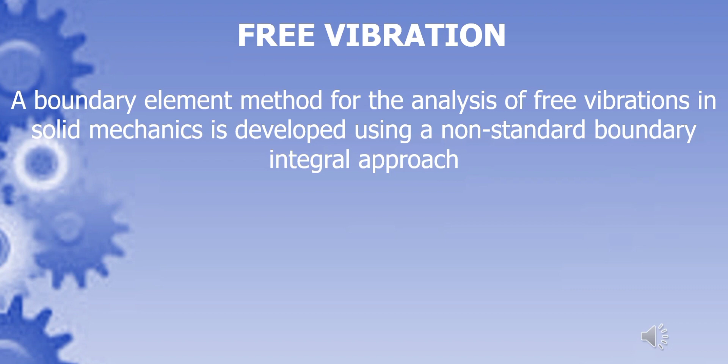So let's move to the next slide. Free vibration again — it offers a great alternative for harnessing green energy and has been receiving significant attention for the past few decades.

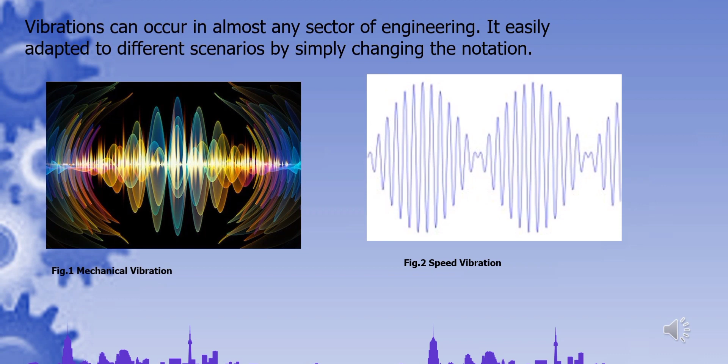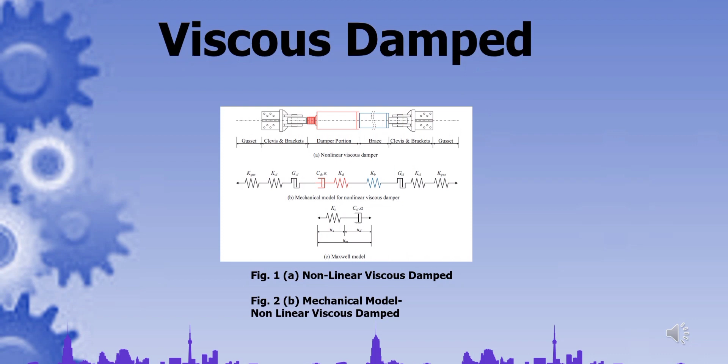Now, after we discuss the free vibration, now let's proceed to the next topic, which is the viscous damping. So, what is viscous damping? Viscous damping is damping that is proportional to the velocity of the system. It means that the presence of frictional forces in the structure transforms the mechanical energy of the system into other forms of energy such as heat.

So if damping is completely absent, in an ideal system, a structure once excited will oscillate indefinitely with constant amplitude at its natural frequency. For example, a viscous damper model considers damping behavior to be similar to a piston moving in a viscous fluid. The viscous damping forces produced are proportional to the velocity of the piston. However, the actual damping in a structure may result from looseness of joints, dry friction between components, material damping, structural damping, and many other complex causes that would lead to nonlinear behavior of the structure.

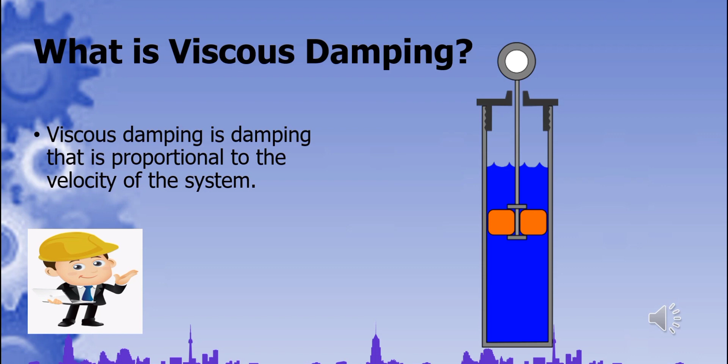So now let's proceed to the equation for damping. We will only consider linear viscous dampers, where the damping force is linearly proportional to velocity. So the equation for the force or moment produced by the damper in either x or theta is: F sub c is equal to c times x dot, and then M sub c is equal to c times theta dot.

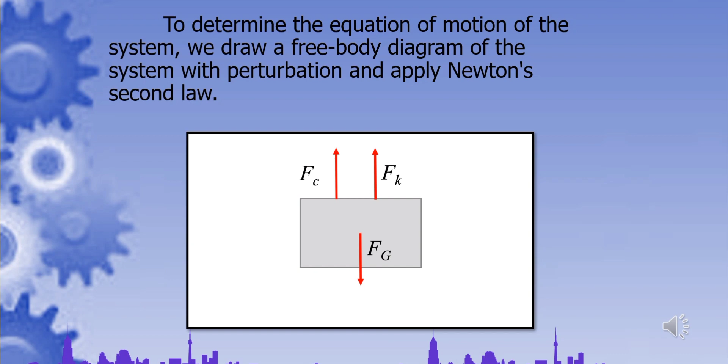So as we can see, to determine the equation of motion, we draw a free body diagram of the system with perturbation and apply Newton's second law. From the free body diagram, we can derive the following given: the mass m, the stiffness constant k, and the damping constant c.

So if we derive, net force sub x is equal to mass times x double dot, and then minus f sub k minus f sub c is equal to m times x double dot, and then minus k times x minus c times x dot is equal to m times x double dot. Then the final equation is: m times x double dot plus c times x dot plus k times x is equal to 0.

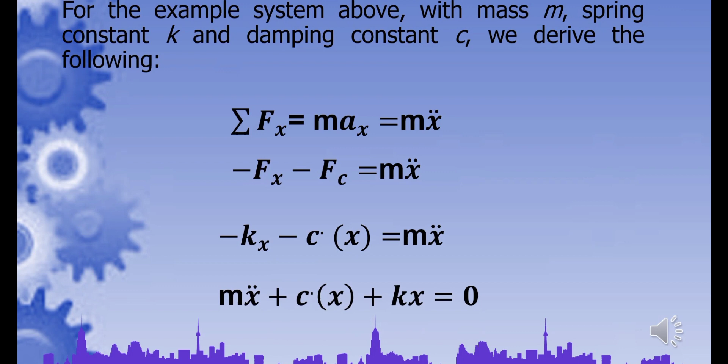So after that, the solution of the differential equation yields the crucial damping statement. So the following is the solution to the system differential equation, and that's it.

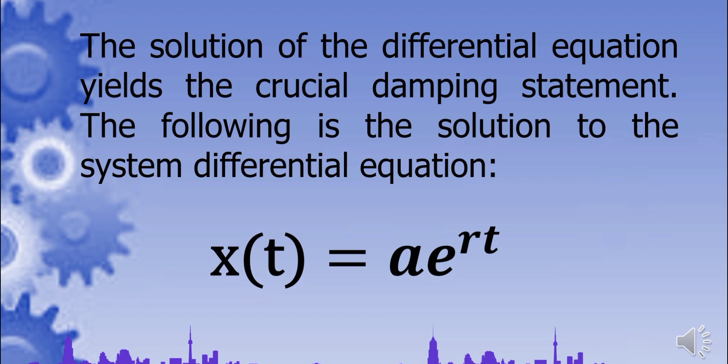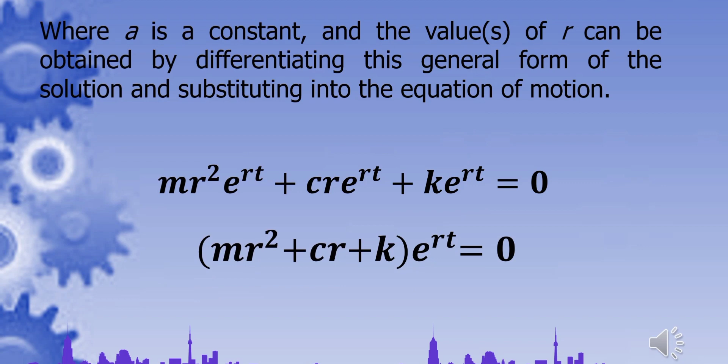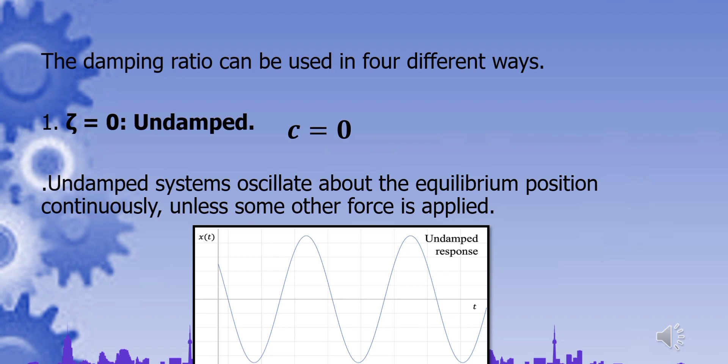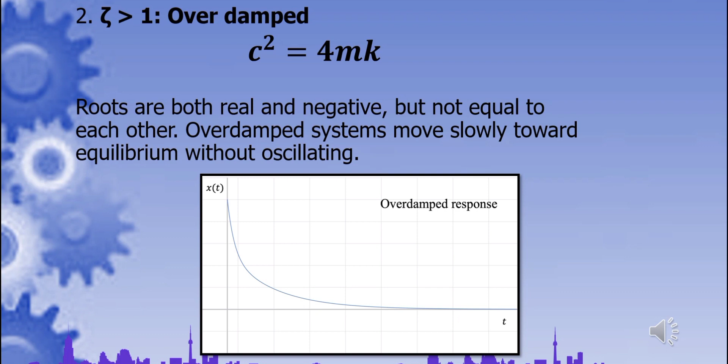Next is overdamped, or C squared is equal to 4mk. Roots are both real and negative, but not equal to each other. An overdamped system moves slowly towards equilibrium without oscillating. Ganyan yung itsura niya sa figure, overdamp, kung paano siya mag-response ng wave ng paggalaw niya. Andito, makikita niyo yung solution for overdamped system.

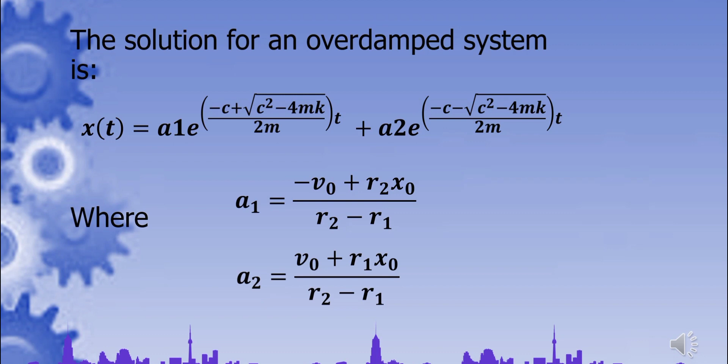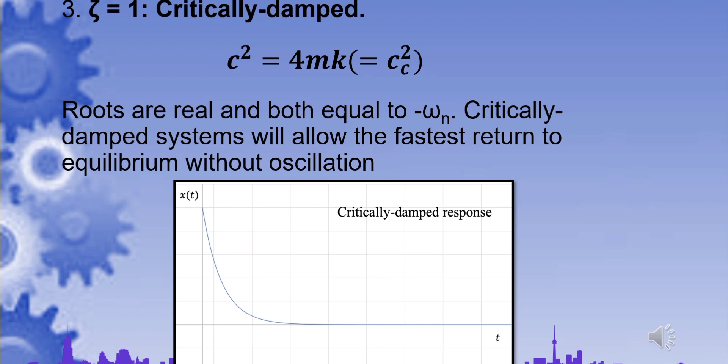The solution for a critically damped system is x of t is equal to (a plus bt) times e raised to negative omega sub n t, where a is equal to x sub 0, and b is equal to v sub 0 plus x sub 0 times omega sub n.

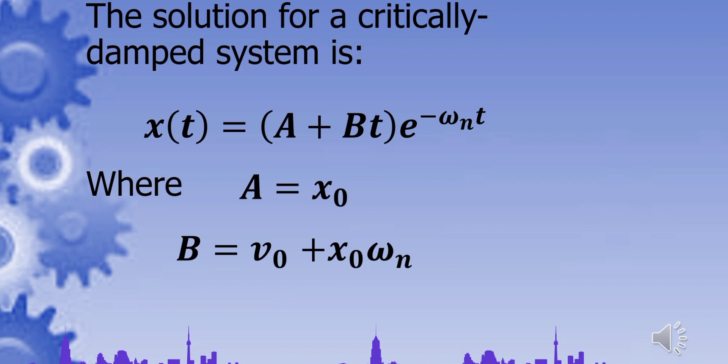Underdamped. Complex numbers make up the roots. Systems that are underdamped oscillate around the equilibrium point. Unlike undamped systems, the amplitude of the oscillations decreases until the system reaches equilibrium and stops moving.

Pag sinabi nating oscillator or oscillations, ito yung pattern na nagbabalik sa original state o kung saan siya nagsimula, after many generations of finite numbers na dumaan sa kanya.

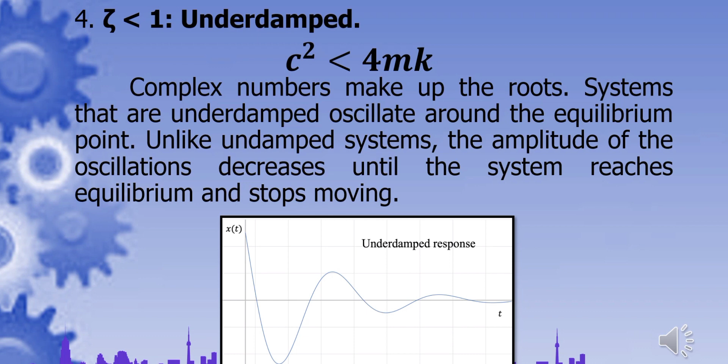Sinasabi dito sa underdamped system, ito yung condition in which damping of an oscillator causes it to return to equilibrium with the amplitude gradually decreasing to zero. The system returns to equilibrium faster, but overshoots and crosses the equilibrium position one or more times.

The solution for an underdamped system is x(t) equals c1 sine omega d t plus c2 cosine omega d t, times e raised to negative omega sub n zeta t, where c1 equals v sub 0 plus omega sub n zeta x sub 0, over omega d. C2 is equals to x sub 0, and zeta is equals to c over 2m omega sub n.

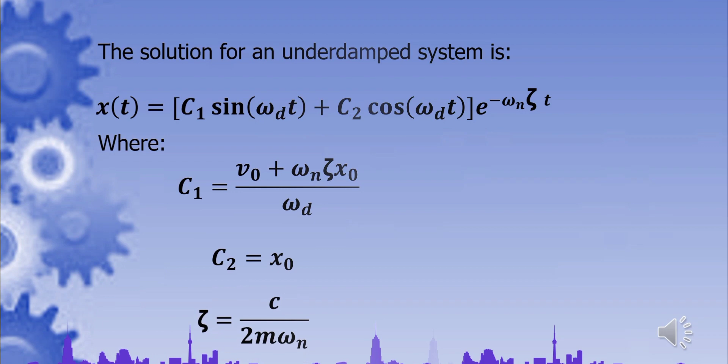This can alternately be expressed as x(t) equals A sine of omega d t plus theta, times e raised to negative omega n zeta t, where A equals the square root of (v sub 0 plus omega n zeta x sub 0) squared plus (x sub 0 omega d) squared, over omega squared sub d. Theta equals tan inverse of x sub 0 omega sub d, over v sub 0 plus omega n zeta x sub 0. Zeta equals c over 2m omega sub n.

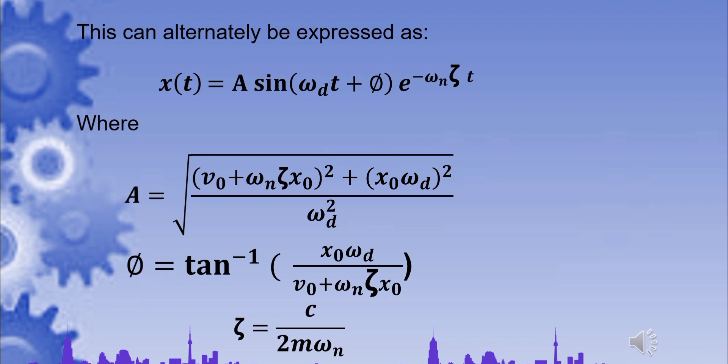Omega sub d is called the damped natural frequency of the system. It is always less than omega sub n. Omega sub d equals the square root of 1 minus zeta squared, times omega sub n.

The period of the underdamped response differs from the undamped response as well. Undamped is equals to tau sub n, equals 2 pi over omega sub n. Underdamped is equals to tau sub d, equals 2 pi over omega sub d.

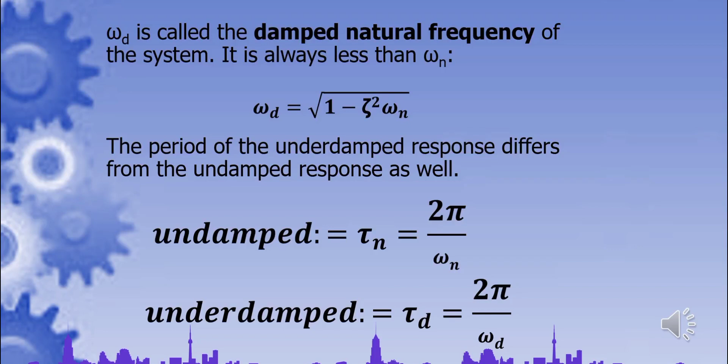So my topic is all about design consideration. Pag sinabing design consideration, nandyan dapat yung concepts, drawings, dimensions, at materials. Dapat meron kang analytical skills, planning, focus, and strategies, dahil naglalaman ito ng mga problem solving kung saan yung equation at graphs ay present. Dahil dito kinakailangan analyzation at kung paano mo ito bibigyan linaw o ma-recognize. So let's figure it out.

Next is, what is vibration design consideration? These are the areas that may affect the requirements, design, or operational concept of a system. Vibration is a phenomenon which exists and presents itself in many ways, such as heartbeats, car travel, or earthquakes, to name a few.

Pag sinabing vibration, ito yung bagay na kung saan nagkakaroon ng mga sounds o paggalaw na tinatawag na periodic motion or oscillation sa isang object, tulad na lang ng sa cellphone, sa train, sa pagsakay mo sa barko, o sa pagandar ng mga machines o sa heartbeat natin. May nabubuo na nagbibigay vibration dito.

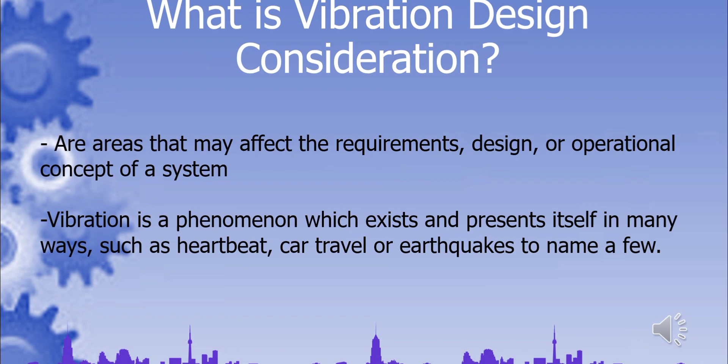Next is ground vibration. Pag sinabing ground vibration, composed ito ng surface wave, R wave, S wave, at P wave. So these are the three types of waves.

First is R wave o tinatawag na Rayleigh wave. Second is S wave o tinatawag na shear wave. Then last is P wave o tinatawag na compression wave.

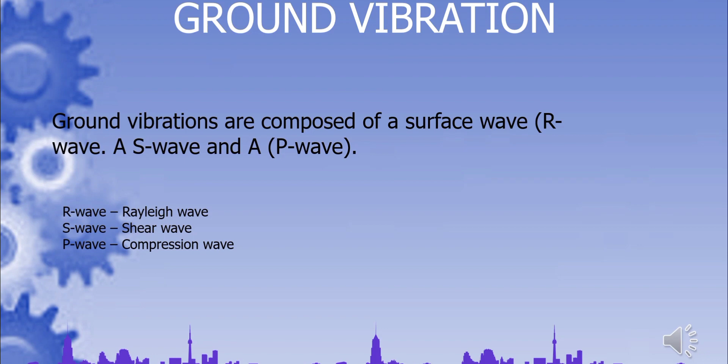So first is the Rayleigh wave. Pag sinabing Rayleigh wave, ito yung earthquake na may violent shaking ng isang rock below the surface ng Earth. Sinabing Rayleigh wave, ito yung nagta-travel sa near surface ng solids, kung saan nag-include siya both longitudinal and transverse motion na nagde-decrease exponentially sa amplitude habang tumataas ang distance surface kung saan nag-iincrease.

Yung existence naman ng Rayleigh waves, na-predict naman ito ni Lord Rayleigh noong 1885. Kaya pinangalanan to na Rayleigh wave kasi binase niya ito sa kanyang pangalan.

So next is S waves o tinatawag na secondary waves or shear waves. Minsan tinatawag na elastic S waves dahil kaya nitong tumulay sa body ng isang object, hindi tulad sa surface waves.

So itong S wave ay transverse waves. Ibig sabihin, yung direction ng particle motion ng S wave ay perpendicular papunta sa direction ng wave ng propagation, at kung saan yung pinaka main restoring force nito ay nanggagaling sa shear stress.

Pinangalanan itong secondary wave dahil nagmula ito sa second type na na-detect ng seismograph pagkatapos ng compressional primary wave o P wave. Dahil yung S wave ay kayang mag-travel ng mabagal sa mga solids, hindi tulad sa P waves.

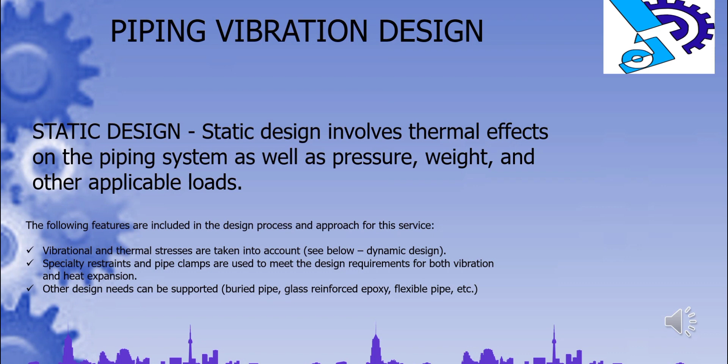Now let's proceed to the dynamic design. Compared to the static design, it focuses on the causes of motion and the changes in motion, known as dynamics. So the pointers or the areas considered include the pressure, pulsation, and vibration affecting the piping near the reciprocating compressor and pumps.

So what is that? Let's consider the pressure pulsation in the piping design, that it affects more on compressor and pump. So last but not the least is the dynamic simulation and assessment of centrifugal compressor, surge control, etc.

So what is that? It means that in simulation and evaluation, we're going to consider the centrifugal compressor, also known as the radial compressor. It is the work absorbing turbo machine that achieves a pressure rise by adding kinetic energy or velocity to a continuous flow of fluid through the rotor or impeller. It has high demand of compressed air, so piping design should adjust. Since we know that as pressure increases due to compression, the pipe thickness increases, which increases the rigidity of the connected pipe, and automatically the loads at the nozzle increase.

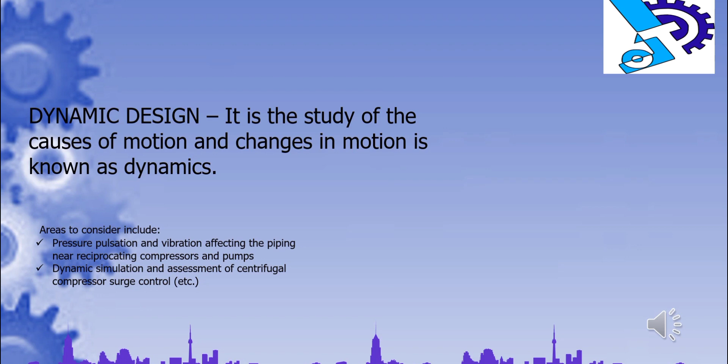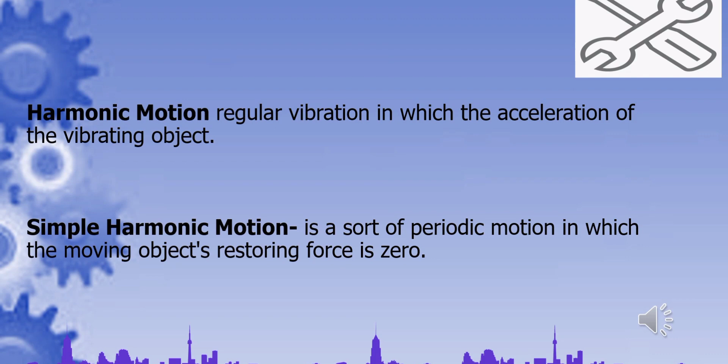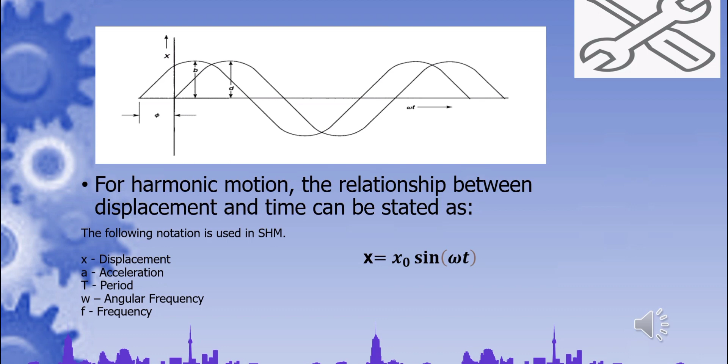Another measure of frequency is the circular frequency, W, measured in radians per second. F is equal to 1 over T, where F is frequency in hertz, T is time completed in 1 cycle in seconds.

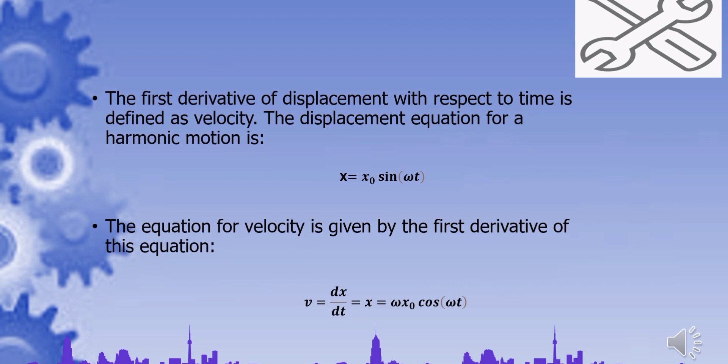Types of harmonic motion. Harmonic oscillator in physics: in classical mechanics, a harmonic oscillator is a system that, when displaced from its equilibrium position, experiences a restoring force F proportional to the displacement x, written as F equals to negative k times x.

Kepler's law of planetary motion. In astronomy, Kepler's law of planetary motion, published by Johannes Kepler between 1609 and 1619, describe the orbits of planets around the Sun.

Quasi-harmonic motion, or the quasi-harmonic approximation, is a phonon-based model of solid-state physics used to describe volume-dependent thermal effects such as thermal expansion. It is based on the assumption that the approximation holds for every value of the lattice constants, which is to be viewed as an adjustable parameter.